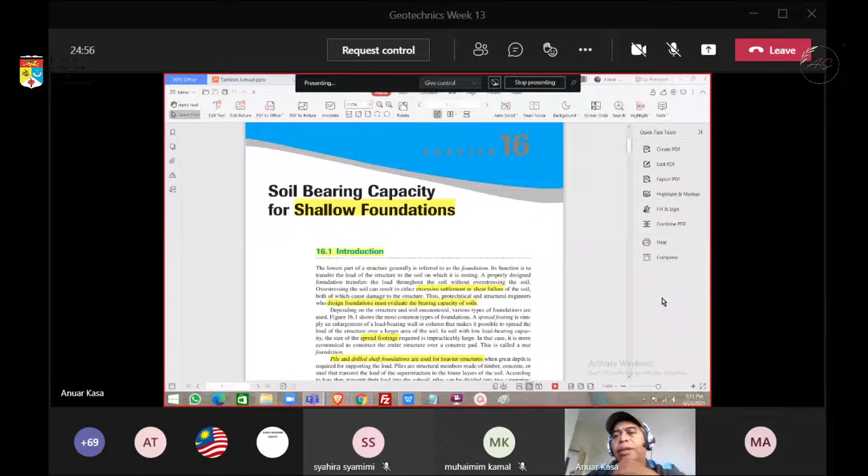To the topics. I think we should discuss the e-test next week, and I happen to know you are going to have another test. Is that right? On the same day?

Okay, and also for your lab report, I already posted the information. Actually I just got it from the textbook, but I think it's fine because I'm not measuring your skill for this course - it's just a report, not the teamwork. So I think it will be fine if we just use the data from the textbook only, and I don't see much difference. So I already posted the information regarding the lab test.

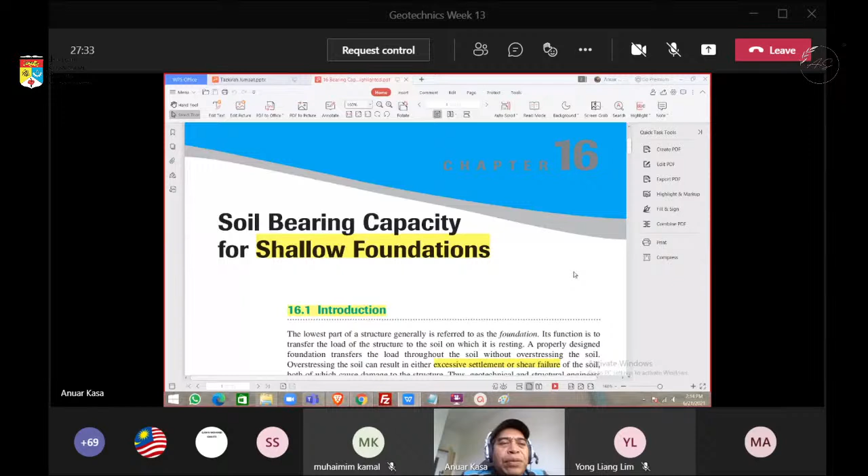I hope you can come up with the lab report for direct shear test, consolidation test, as well as triaxial test. Each group just submits one report, and the time is flexible as long as you submit during this semester, even until final grading - even during the final exam week it will be fine. Since we don't have the final exam, you may have time to do it, or it's better if you could finish it before the exam, or do it the latest during your review week. You have a break of 1 week before the final exam, by that time you should be able to finish the lab report.

What you can do is distribute the workload. You have 5 members in a group, so just distribute the load. That would be a good idea for you to finish the reports as soon as possible. Is there any question regarding the lab reports?

Okay, if you don't have any questions, then we can proceed with the material. You can also ask me regarding the e-test. For this chapter 16, it is about the soil bearing capacity of shallow foundation.

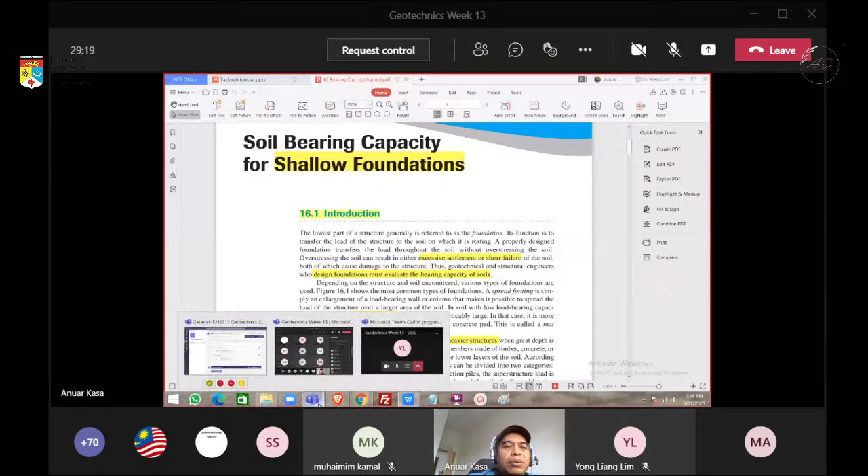Normally we design, or when we want to construct foundations for any building, first of all we need to know what is the soil.

To do that, we need to do what we call site investigation, where we bring equipment to the site and do boring tests. We try to get the soil sample for every meter of the soil, take the sample and bring it to the labs.

Then we do some tests such as Atterberg limit test, compaction test, direct shear test or triaxial test, as well as the consolidation test, so that we can get the soil parameters. Only when we get the soil parameters can we design the foundation.

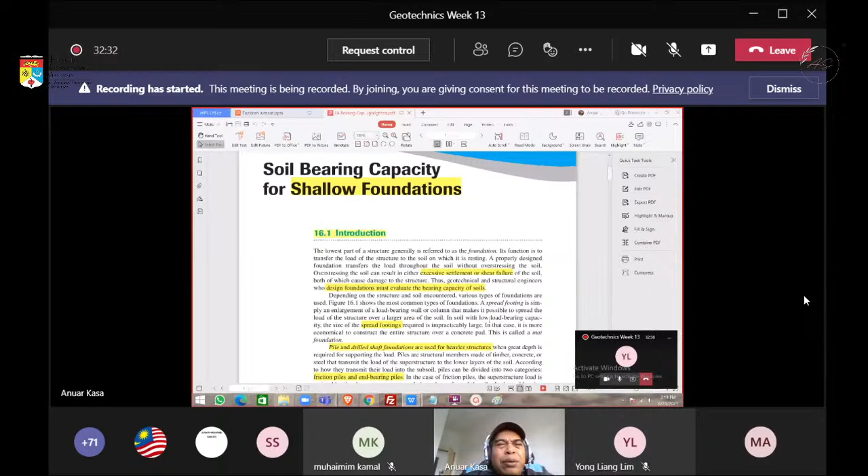In normal practice, we try to get the soil sample under the columns - the main column, the most critical column, which has the largest values, for example maybe 300 kilonewton. Then we know roughly the load that will be imposed on the soil, and only then we could do a better or more accurate lab test, because we know the pressure that will be applied on the soil.

So for our test, for example the direct shear test, the load should be in a certain range. When we test the soil, let's say it is 300 kilopascal, then we should test at that value, at least 300 kilopascal for that sample. Then we would get better soil parameters.

So normally that is how we get the soil parameter. But for most textbooks, the soil parameters are already given. For example, we already know the unit weight of soil, the cohesion C value, and the phi value, the internal angle of friction. Normally those are obtained from direct shear test, and for more accuracy, triaxial test. From consolidation test, we get the pre-consolidation pressure PC, and we also know the Young's modulus E of the soil. From that, we can do the design for the foundations.

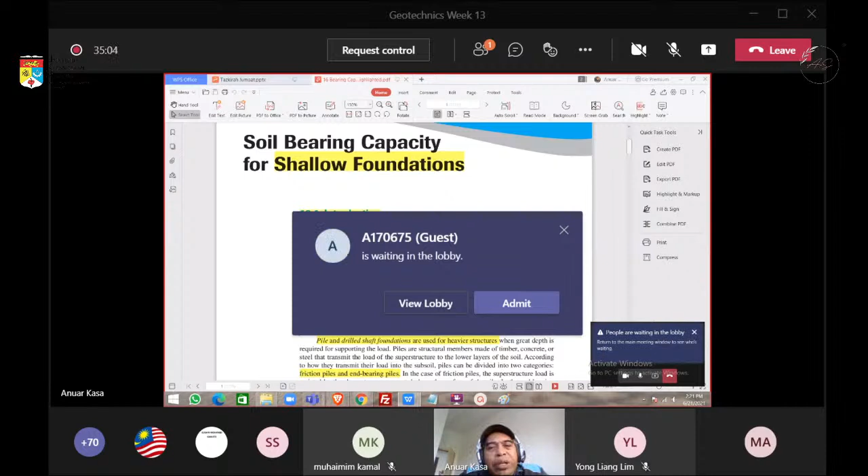For this textbook, normally we are given all those values, and here we would like to know the theory.

For example, bearing capacity for shallow foundation. Normally when we design, we don't know whether we are going to do a shallow foundation or deep foundation. Generally, we just base it on the type of building, for example maybe a 4 or 5 story building. If the soil is good, we can just use a shallow foundation, not a deep foundation. Deep foundation is like pile, which we see a lot in construction for high-rise buildings. They use pile, while for shallow foundation we are talking about not deep foundation.

I think there is a type of shallow foundation also mentioned in this textbook. So, okay, we go straight to the topics.

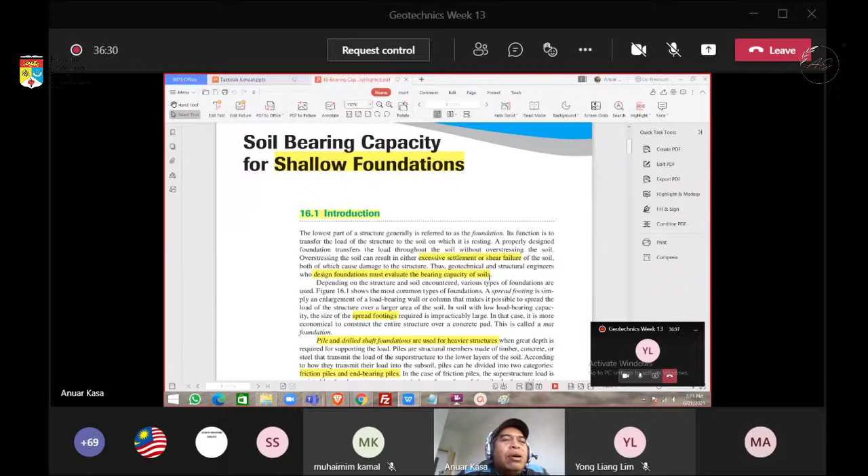Normally we want to know whether the soil can take the load of footing or columns or not. And we would also like to know the settlement, how much the soil settles. From that, we would know whether the foundation is okay or not, and whether we want a shallow foundation or a deep foundation pile.

Okay, so here it says, for example, the pile, and some call it drilled shaft foundation. Normally for heavier structures, more loads, or high-rise buildings, we need to have a pile foundation. For small buildings, for example a 2-story bungalow, a normal one, if the soil is good, then we don't need a pile. We can just have a spread foundation or pad foundation, mat foundation for footings.

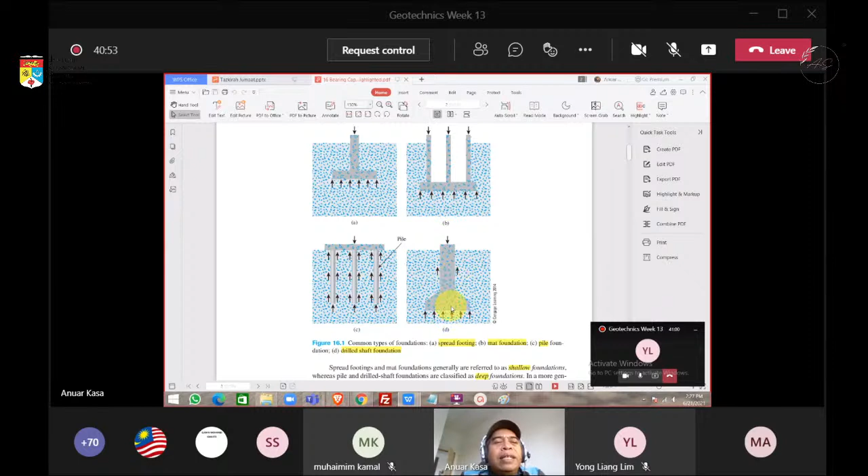And the other one, this is the drilled shaft foundation. So this is how it looks. It takes the load at the bottom part here as well as the friction, but here the bottom part has more area to cater for the loads. So roughly that is how we decide whether to use a deep foundation or shallow foundation.

Okay, we need to know what is the ultimate bearing capacity - how much the soil can sustain the load of the building. The ultimate is the highest one. So what is the highest strength or capacity of a soil to bear the weight of the structure?

Here we can see, let's say this is the foundation and this is the soil. If there is a load on top of the foundation, or the weight of the structure, through time we will see an increase in settlement - the value will increase until a certain point, for example point 1. That is the general shear failure, we call it. If it goes as if there is no peak, then that is local shear failure. So it's important to know general shear failure versus local shear failure. General normally reaches a peak; local is still progressing.

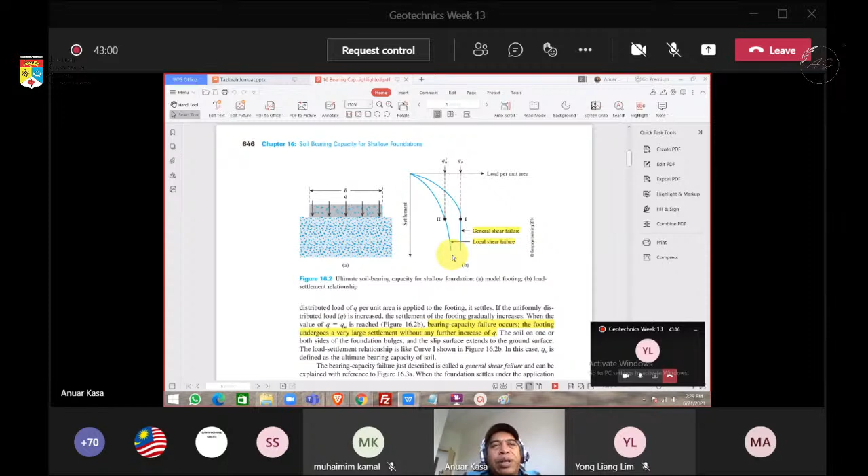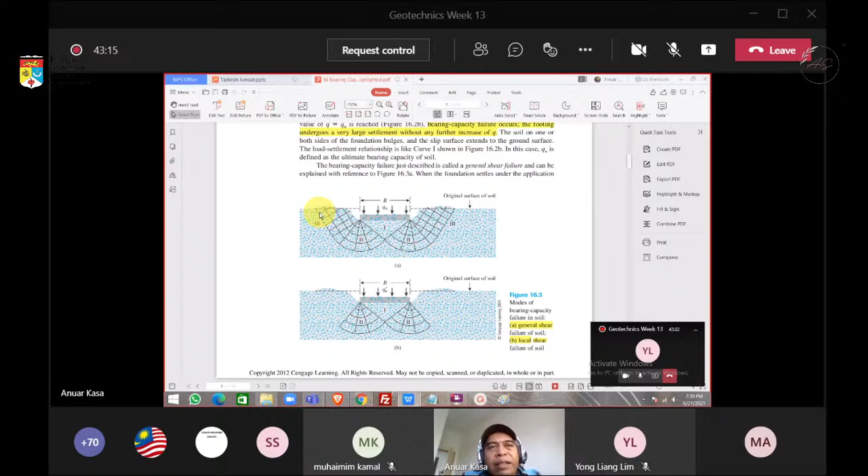Here for part A, this is the general shear failure, where let's say this is the foundation. When there is a load on top of it, the soil will settle and move downward, creating a triangle under the foundation, which is area 1. The foundation is pushing the soil until there is a shear along the envelope, creating area 2, and area 2 on the other side as well, so it is symmetrical. It pushes the soil until there is a bump, the soil displaced, and that part is part 3. So this is the general shear failure.

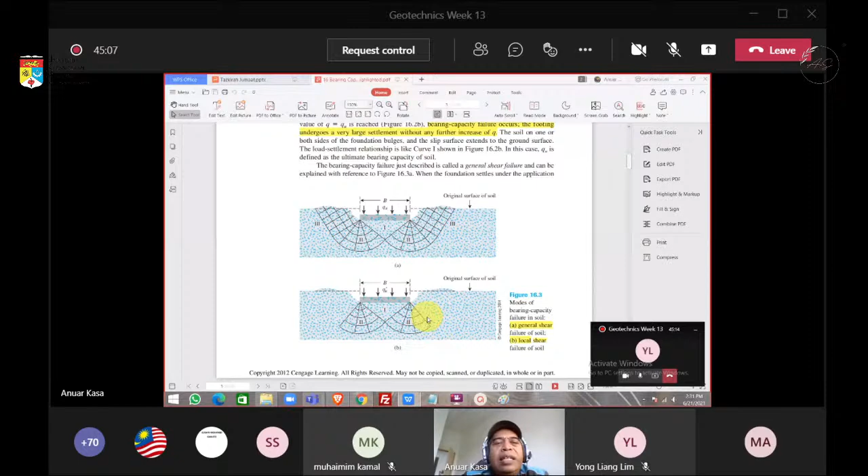And part B, this is the local shear failure. Local means it still hasn't reached the surface of the soil. There would be a buckle or a bump on the surface, but the soil isn't reaching it yet, it's still progressing. So we call it local shear failure. So this is the concept. You need to understand there is a general shear failure and a local shear failure.

And then we've been introduced to Terzaghi's ultimate bearing capacity equation. This is a well-known method for calculating the ultimate bearing capacity, used by practicing engineers.

So the issue is, for example, a shallow foundation like this one, and here we introduce a depth of foundation. So from the bottom until the surface of the soil, that is the depth of foundation.

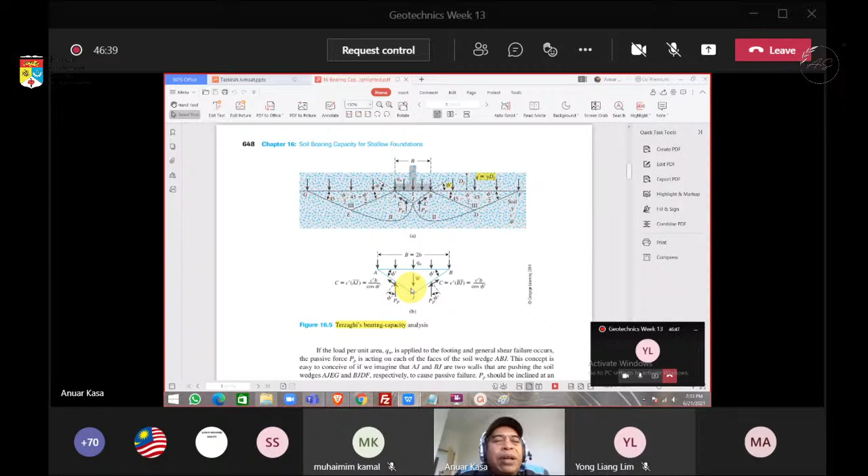This equation is actually based on this triangle, where they calculate to find the equilibrium of forces between the external forces and internal forces, as well as the shear force. By using that concept, they come up with the bearing capacity equation. Terzaghi came up with the bearing capacity equation, where you can spend your own time looking at how they derive it.

What is important here is this: the bearing capacity equals C times NC plus Q times NQ plus half gamma B N gamma. The values NC, NQ, and N gamma are given by equations 16.5 through 16.7. So this is the equation.

At the end you come up with the ultimate bearing capacity, Q ultimate, according to this equation, where C is the effective cohesion, Q is the surcharge, and B is the width of the foundation. So here we have the equation, and we can calculate the bearing capacity using it.

At the end, we need to consider whether the foundation is square or circular. For square, the equation is like this one, with 0.4 instead of 0.5. Normally it's 0.5 or half, but here they use 0.4 and 1.3 as coefficients for C, the first term, and 0.4 for the other term. So if it is a square foundation, use this equation for ultimate bearing capacity.

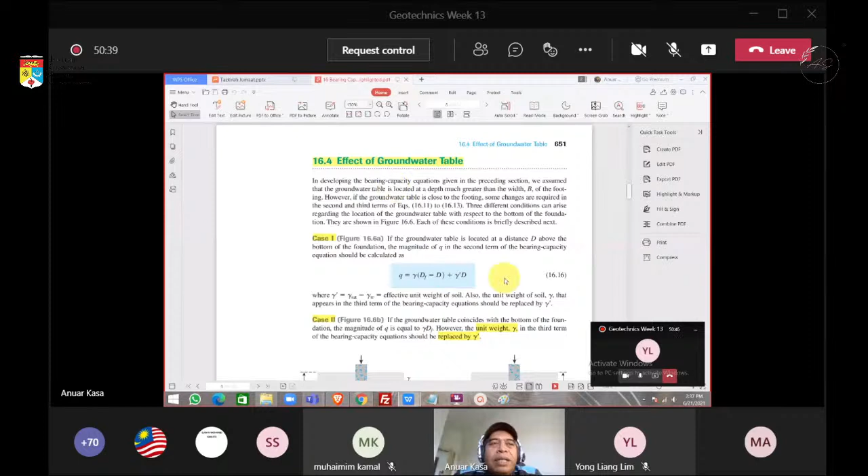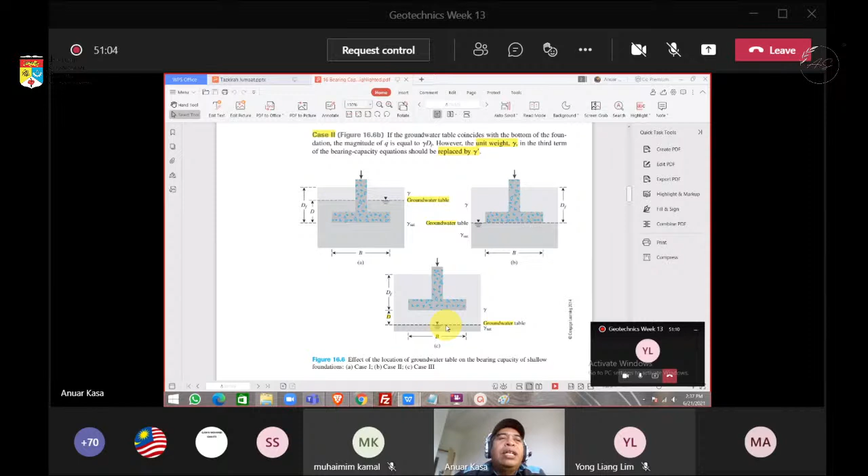And here is when there is a groundwater table. There are a few cases here: case A, when the groundwater level is above the foundation; case B, when the water table is exactly below the foundation; and case C, where the groundwater table is below the foundation. So they call it case 1 until case 3. You just need to use the right equation here, and it's also important to get the value of D f.

D f here is the height between the below the foundation until the surface of soil. So you can use the equation given for those three cases, and to calculate the factor of safety, which is very important in design of foundation.

Factor of safety normally used is about 3 or more, meaning that if you design the foundation, it can take 3 times, it is 3 times stronger than what it's supposed to be. So you triple the strength. In that case, it is less likely that the building is going to fail due to foundation if everything is taken care of, because it's supposed to be 3 times or more stronger than what it should be. Unless something is beyond our control, then I would say our foundation is not safe.

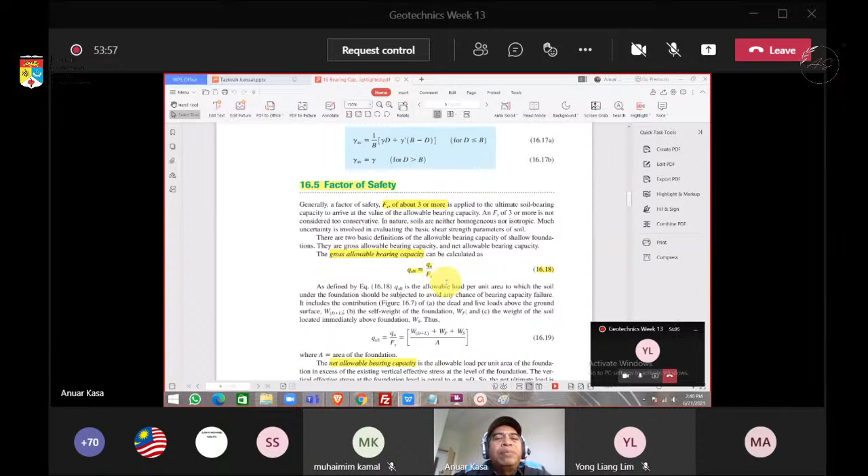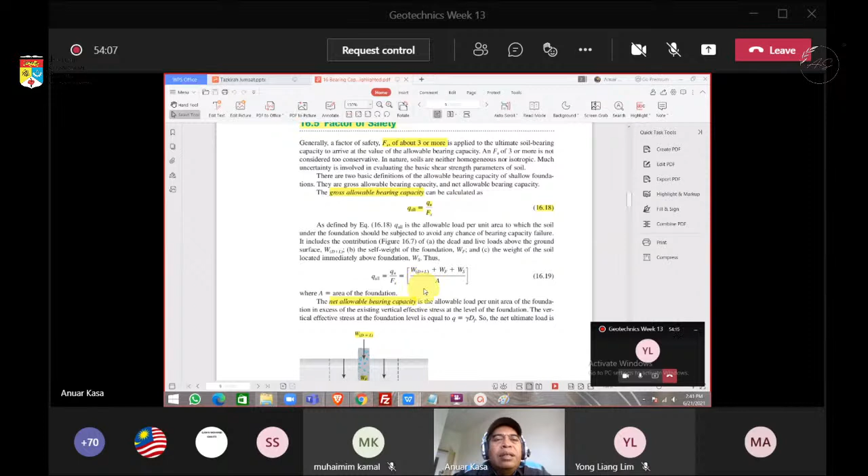So Q allowable is the one that we allow for the bearing capacity, so it is much lower, here about 30% of the Q ultimate, the ultimate bearing capacity. So it's also given here in the equation. You can use this equation, and I think it's quite straightforward. If you read this one, you should be able to understand.

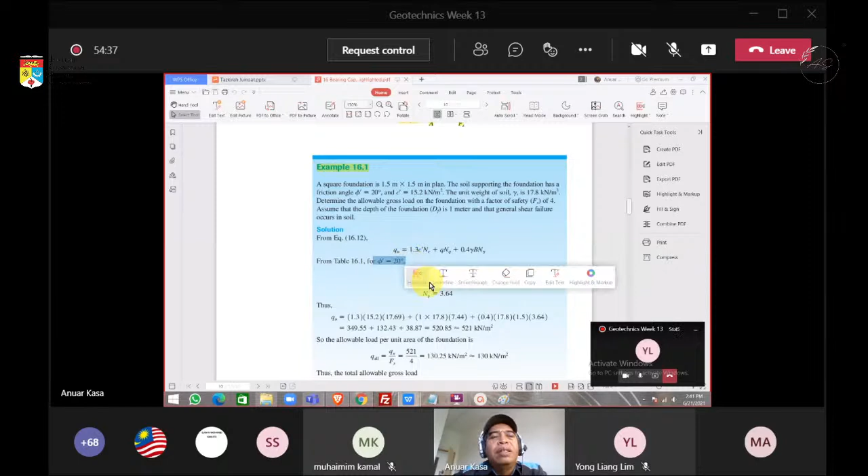We do have example 16.1 to understand better, so we can see how they use the equations and how to use table 16.1. For phi equal to 20, for example, we just check with the table and get the value here. And since this is a square foundation, they're using the equation for square foundation.

And if we just continue, Q allowable using this equation gives us 130. And then if you want to know what is the total allowable gross load, this is the load at column, or loads applied on the footing.

So we need to use this equation because it's B squared, the area. So Q is kilonewton per meter square divided by the area, since we want to know Q, pressure equals Q over area. So we bring the area here, multiply it with the area, so Q force equals pressure times area, B squared here.

So that is how we calculate, we know what is the allowable column or foundation load that we can apply to the foundation.

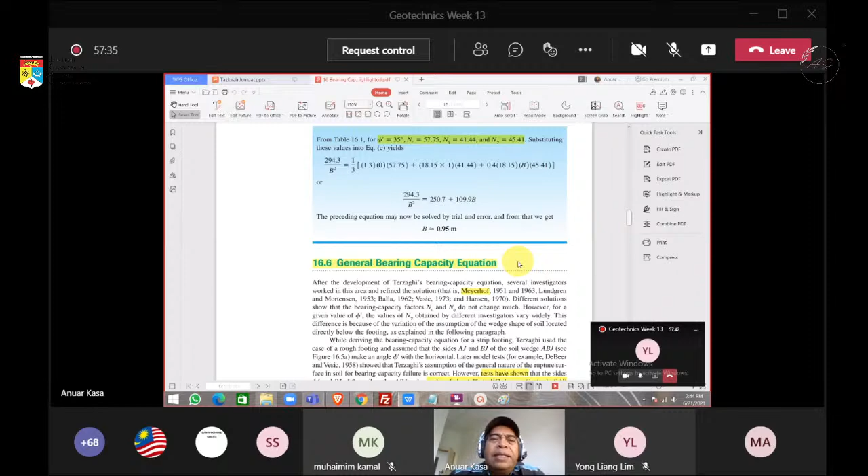Just now we were talking about the Terzaghi bearing capacity equation. Now there is another equation which is a general purpose one, the general bearing capacity equation, which was come up with by Meyerhof and some other researchers, but normally people call it the Meyerhof equation, or the general bearing capacity equation.

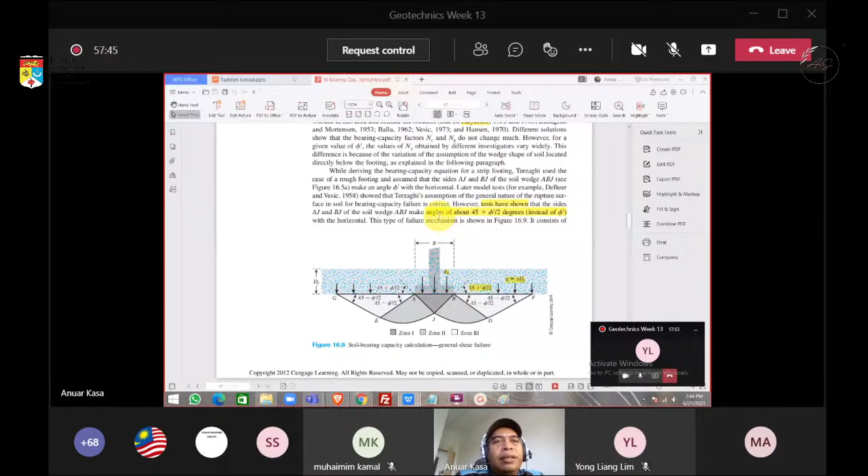It is more or less the same, except it is more general. So here I show you the difference: they are using the angle 45 plus phi over 2, that is different than Terzaghi, instead of using phi. So then the calculation becomes more complicated. I think you can read the derivation here, and at the end they have

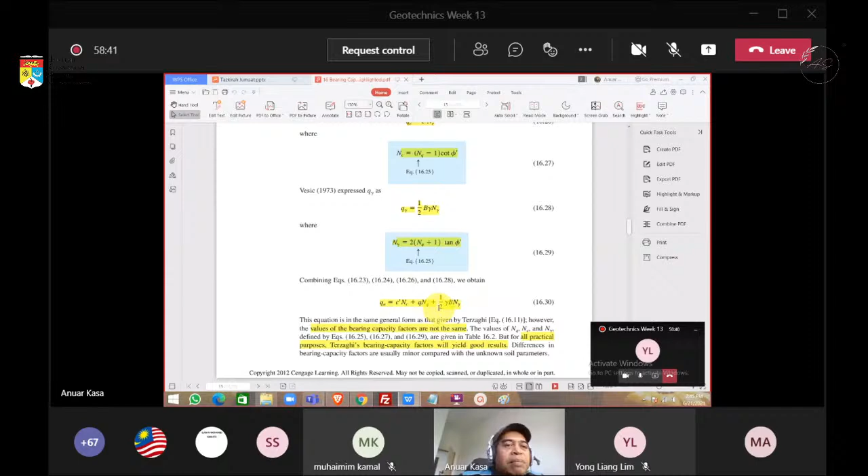an equation in the form of this one. First they have this equation, which is quite similar, the same general form more or less, but now they introduce depth factor, shape factor, and inclination factor. When they introduce that, it becomes like this one, the modified general ultimate bearing capacity equation. So this is the general one.

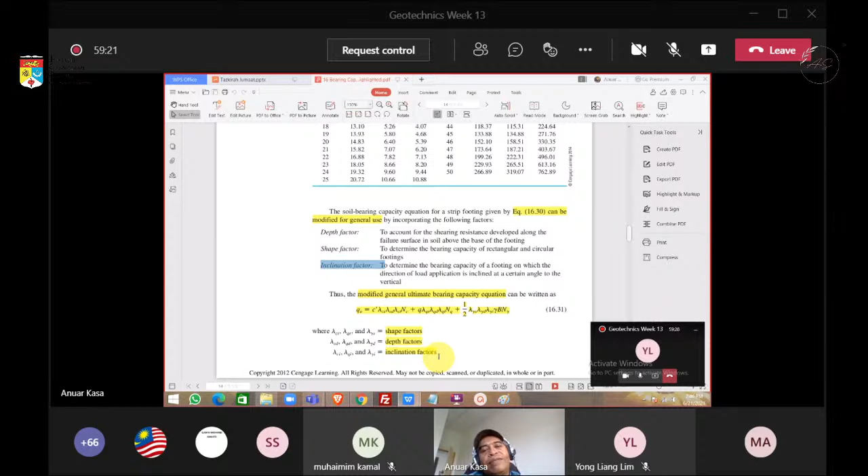So we need to know what is the lambda, CS, and so on here for the shape factor, the depth factor, as well as the inclination factors. And those values are given: for example, the shape factor, the equation for lambda is given by equations 32 until 34, where L here, we need to differentiate between B and L, because normally L is longer than B. Let's say we have a foundation that is 2 times 4.

So L is 4 and B is 2. B is always less than L, L is always greater than B. So we need to check for that one also, sometimes we may use a different one.

So for the depth factors and also the inclination factors, the equations are given, and then you can just use the equation for calculation.

Whatever was before this, the value is for the drained condition, meaning effective stress, with the prime on top of the value. So you need to find C prime and phi prime, that is the drained condition. If you remember the lab test for triaxial, and sometimes also for direct shear, there is phi and effective phi value, as well as C and effective C. That effective means it is under the drained condition, meaning the water is removed from the sample.

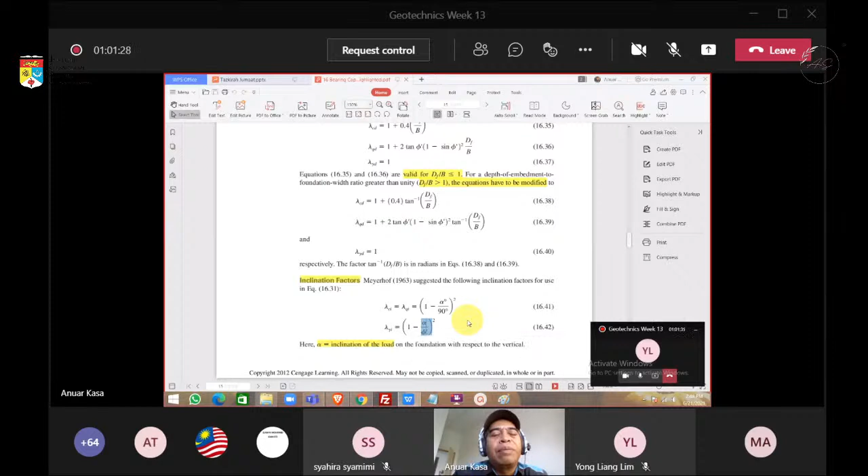But for the undrained condition, this is the total stress, we are talking about total stress. If you remember, effective stress equals total stress minus U, or pore water pressure. So if you want to calculate in terms of total pressure, the equation is given here, and the equation transforms to this one, that is for total pressure.

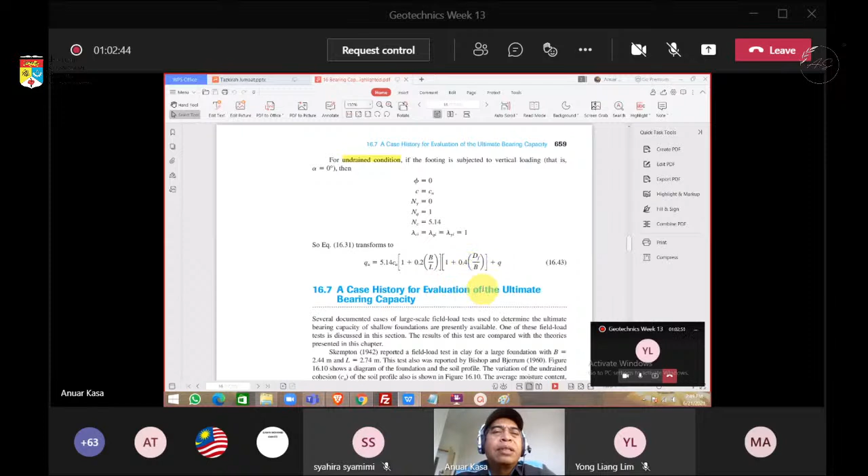You may ask why we want to use the effective pressure and the total pressure. Normally for temporary works, let's say you want to analyze temporary works, we use the total stress equation. But let's say it's for permanent, longer time work, supposed to be the final one, normally we use the effective stress. For temporary works, we can just use total stress, for undrained condition.

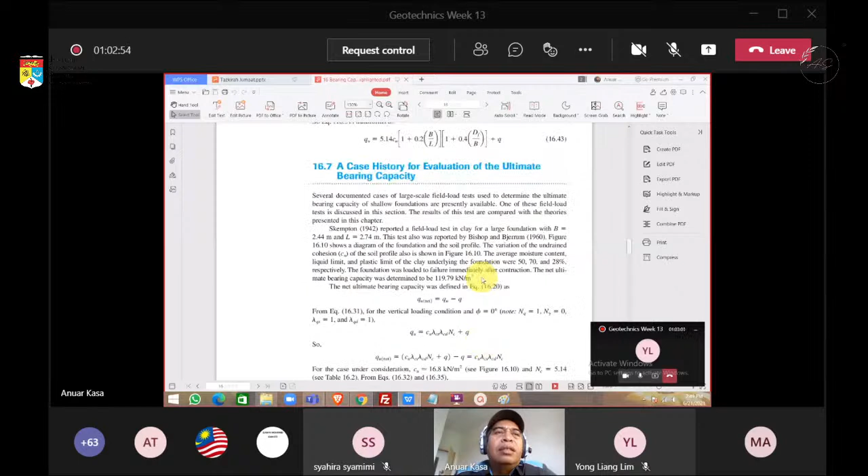So this is the case. I think you can skip this one, the case history and so on, but if you want to read, it's fine.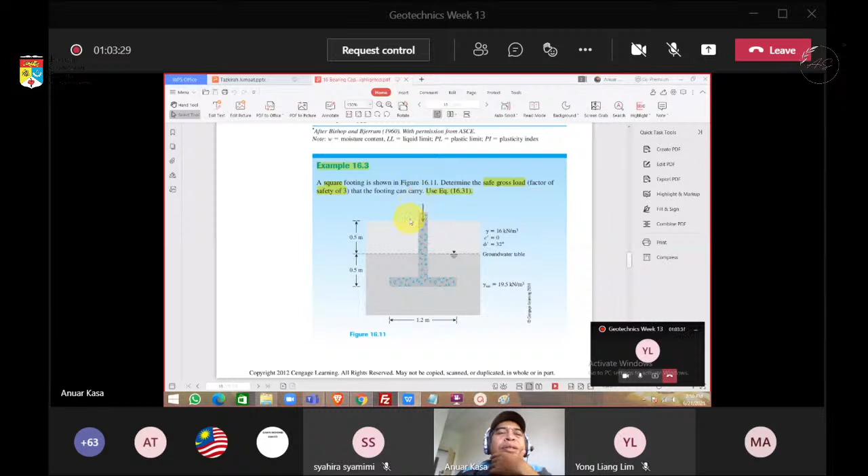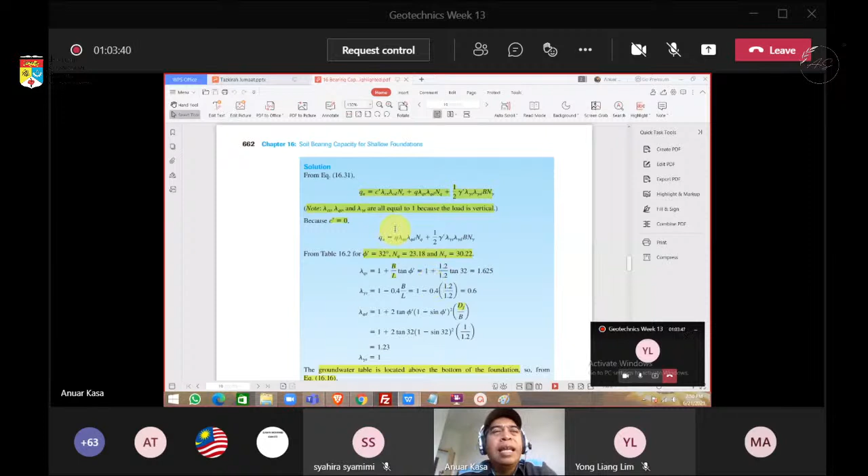Okay, so we have an example given here: how to determine the gross load for a square footing. What is the gross load? What is the P value here? What is the load here? We can look at this example problem to know how to calculate it using the general bearing capacity equation, where they are using the shape factor here.

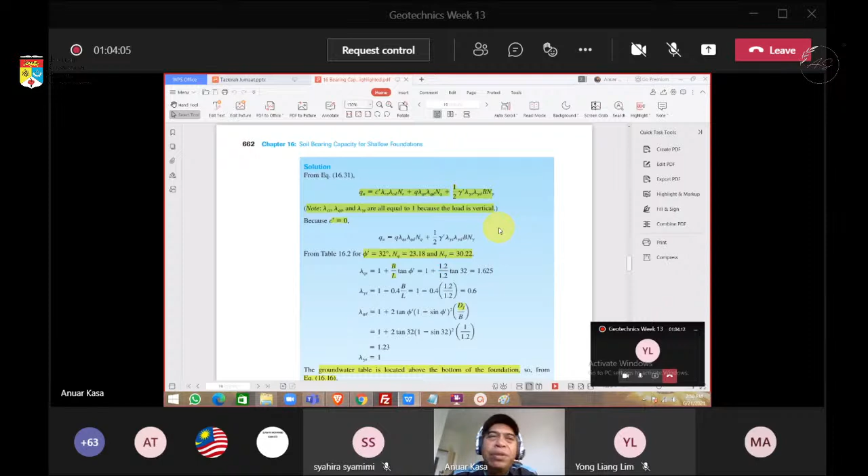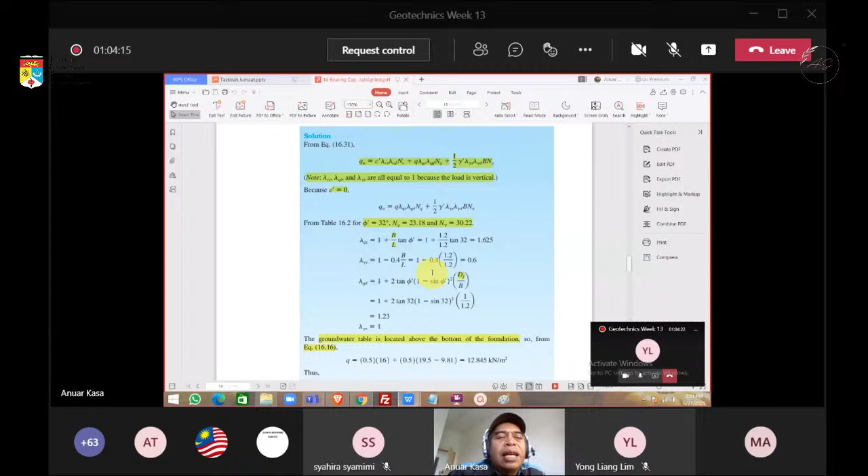If you look here, they're using the shape factor, the depth factor, and also the bearing factor. So this is the general bearing capacity equation, or the Meyerhof equation. You can see you need to calculate the lambda for the depth, shape, and also the inclination factor. And here at the end we get the gross load, what is the load that we can apply to the column or to the foundation.

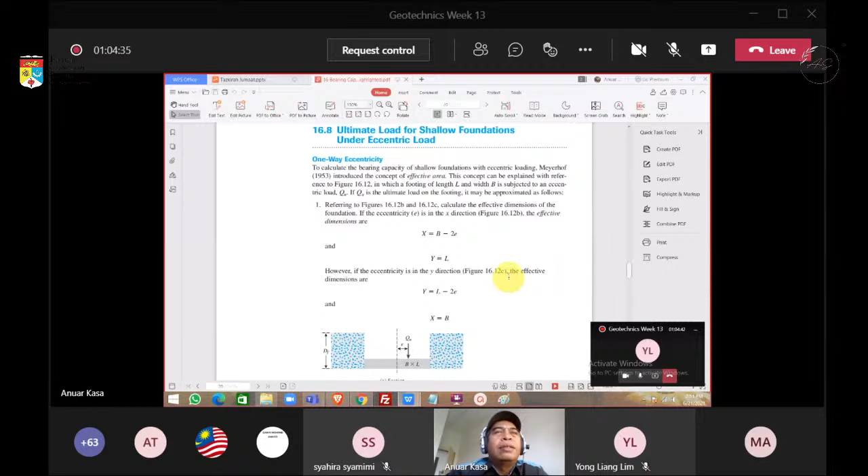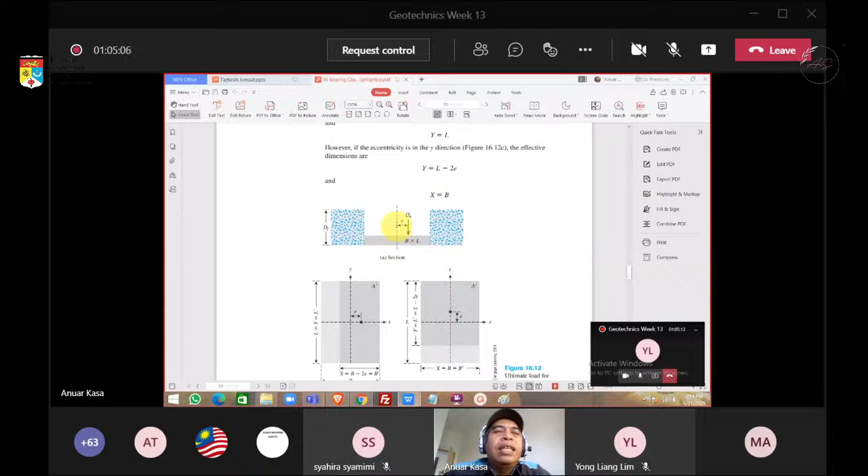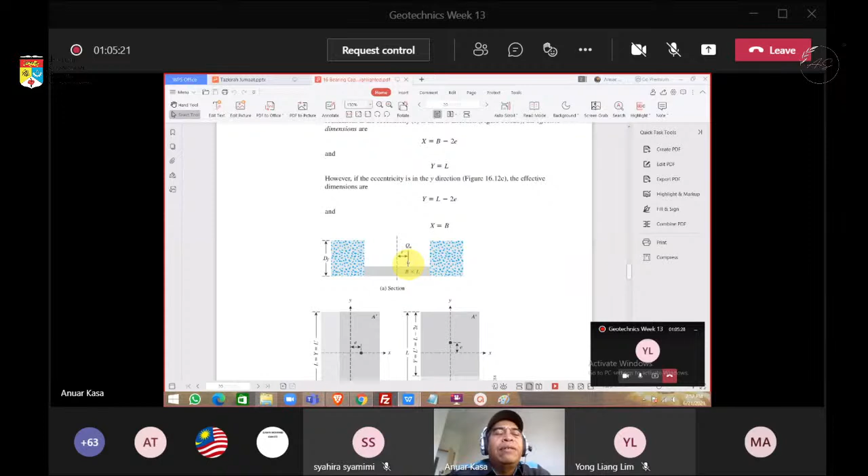And here, 16.8, where we want to know the ultimate load for a shallow foundation under eccentric load. Eccentric load, we are talking about this one here. The eccentricity is, for example, like this, not exactly at the center but a little bit off. So that is eccentricity, if the load is off the center of the column, for example, then we have to consider that using the right equation. So eccentricity meaning it is off the normal one.

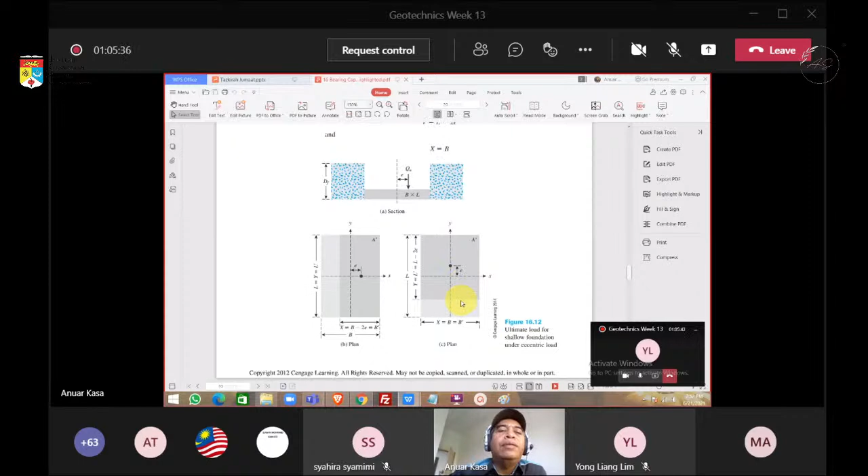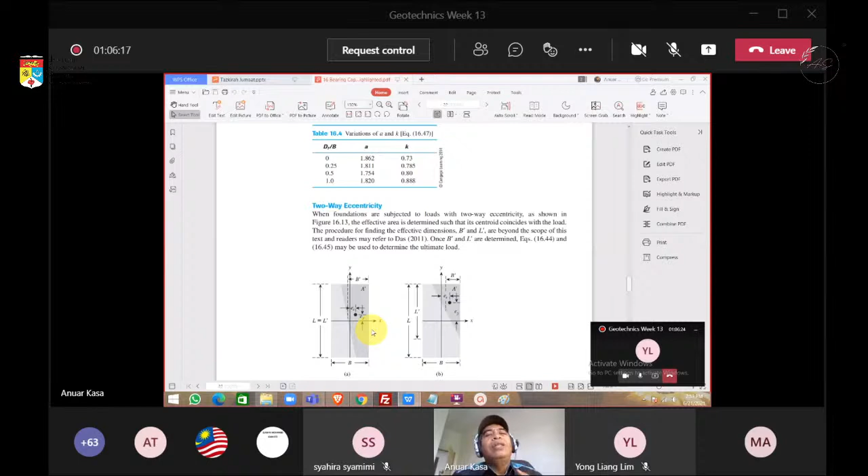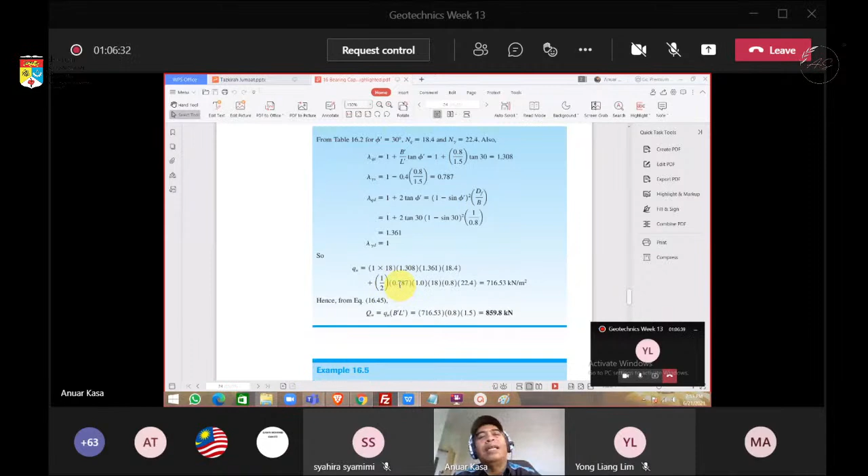So it is off, then we can use this equation and continue. Let's say we have a two-way eccentricity, meaning in the x direction as well as the y direction. So here, instead of at the center, the point of interest, the load we apply off the center, so we have the y value and x value of eccentricity, and we need to cater for this in our calculation. So here it shows an eccentricity problem, so you can look at how the calculation is done.

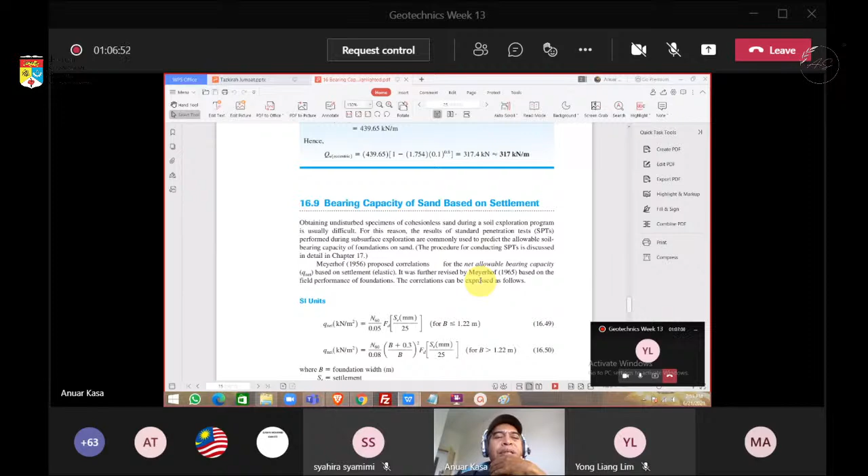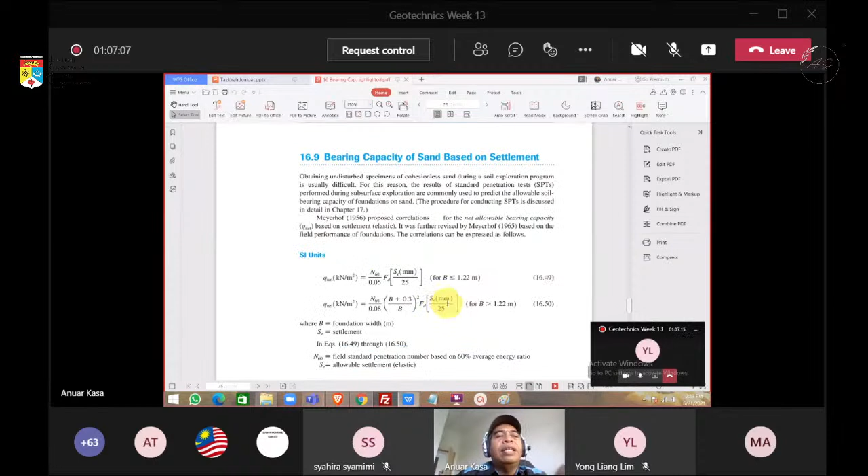And then this one, 16.9, is about the bearing capacity of sand based on settlement. So based on settlement, what is the bearing capacity? This is for sand, so you can look at what the settlement is, calculate the settlement and so on. The formula is given here, and at the end you can get the settlement.

Okay, 16.10 is about plate load test. Normally, when we do pile or even shallow foundation, we check after we install it. After installing the foundation, we go to the site and do the plate load test to check whether the settlement is within allowable limits or not.

So we need to do this. If you look at the site, you see a lot of big stones. At site, that is for the plate load test. They apply a lot of heavy stone or concrete blocks on top of the foundation to test whether the foundation will be okay, whether it can sustain the load, and what is the settlement when we apply the real load on the foundation.

And normally they apply until double the load. Let's say the column is supposed to handle only 100 kilonewton per meter square, but when they test it, they double the load, maybe 200 kPa. Then they know that the foundation strength is reliable, so it is good for the building.

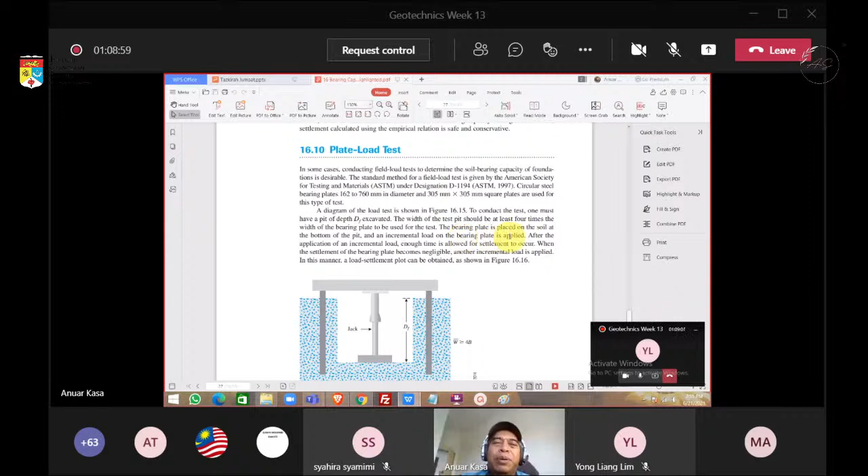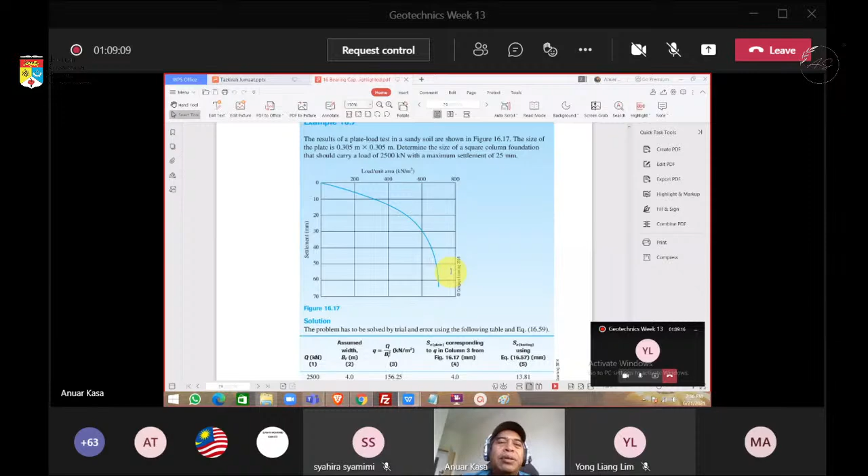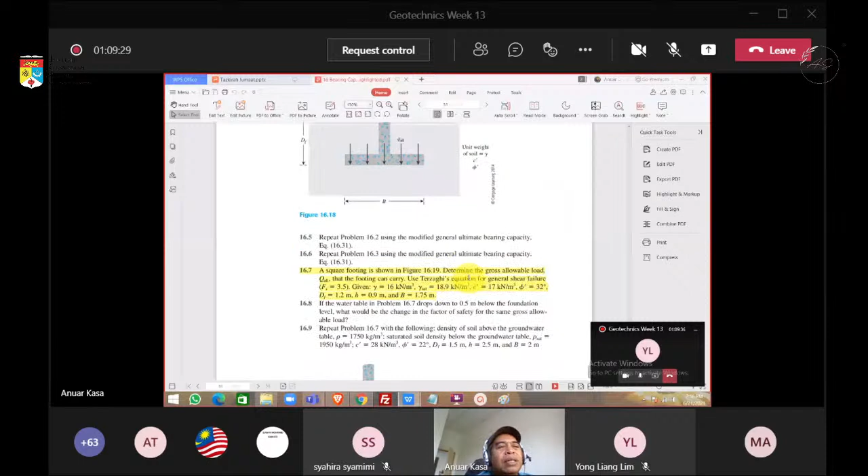Okay, but this one you can read on your own, the plate load test. So that would be the topics for bearing capacity for shallow foundation, and you're supposed to do the assignment here. I think I already posted the assignment, so you can do it on your own. Yeah, I think that would be for this topic.

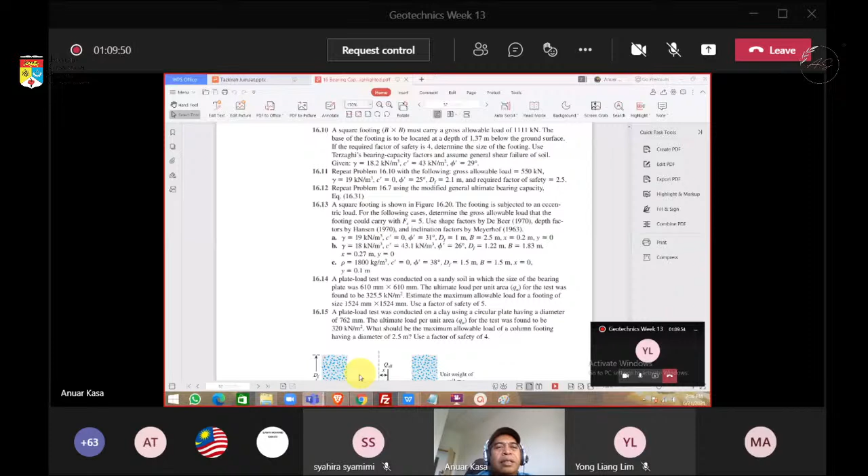Unless you like, or you have any question, then we can talk. Okay, is there any question? Oh, they're all already gone. Okay, is there any question regarding this topic? No.

Okay, yeah, you can also look at the teaching video that was recorded for the quiz students, I think last semester. So I see they are more or less the same.

Okay, then I open the floor for questions about anything regarding the e-test as well as the course in general. You can ask any question because next week we don't have much time, since we are going to have the e-test, and after that you are going to have a break, and then after that your final weeks. So yeah, any question?

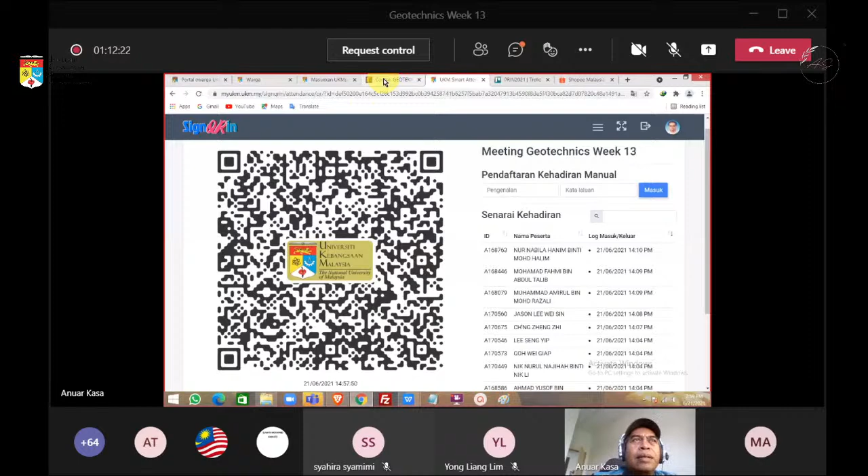Okay, let me show you. Okay, here, yeah, I think I can just look at from yours.

Okay, let's say direct shear test here. So here I already posted the problem. For example, for direct shear, each group is required to prepare a lab report which consists of a title, introduction, procedure, lab result, calculation and discussion, also summary.

And then for group 1 until 10, use information or data from problem 12.4, while group 11 until 20 use problem 12.5. So the demo for the direct shear is also given here.

And here, if you click the problem or the data, okay, so for group 1 until 10, they're using this one. So actually, it cuts a lot of your time.

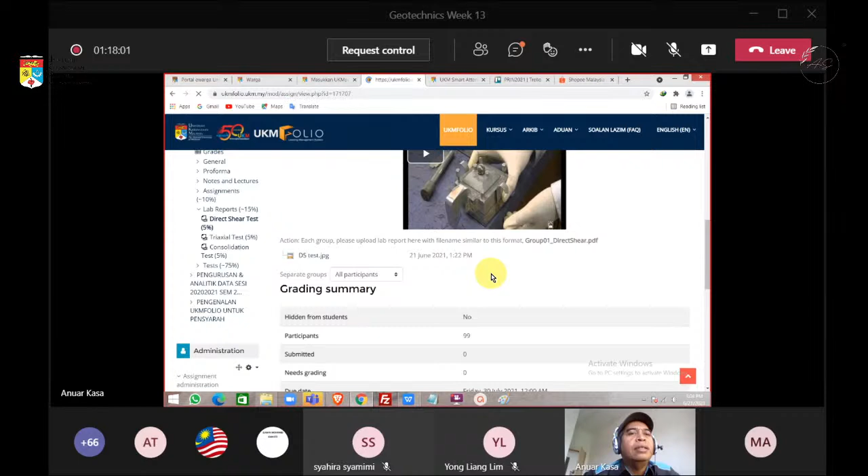Okay. If we look at the triaxial, the same thing - there are two problems given here, one for group 1 until 10, and also group 11 until 20. Okay, sample problem like this one.

Okay, here using the consolidated undrained triaxial test, CU test, and the sample is also mentioned. It has a 4-meter clay layer in the field. Estimate graphically the Mohr-Coulomb shear strength parameters C and phi, and then estimate the shear strength in the middle of the clay layer.

So this is the result from the test, where sigma 3 is the minor principal stress or confining pressure, and this is the axial or deviator stress. So you get values like this, and the pore water pressure is also given here. So similarly, if you do the test, you're going to get something more or less like this one. But from this value information, you just need to...

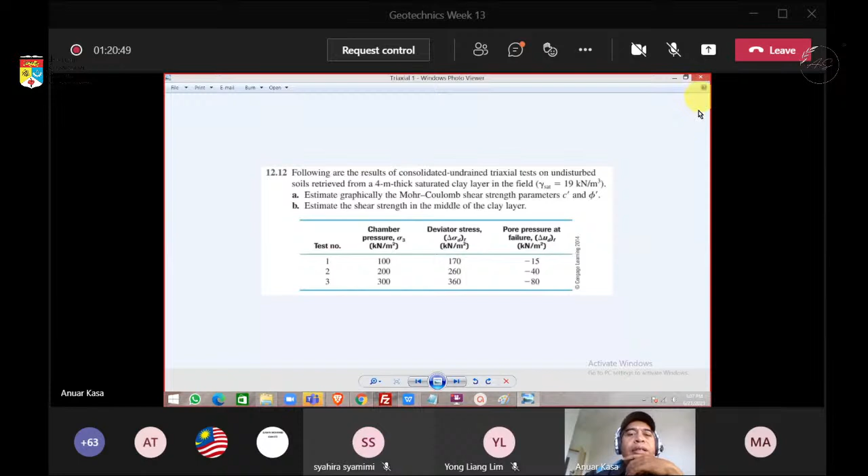Okay. And the last one about the consolidation. Okay, the same thing, we have two problems. I choose one of them.

Okay, so this is for the consolidation test, and the data is given there. It's like the lab data where you have pressure and you have the change in dial reading. Normally when we apply, we need to know the change in dial reading, that is for settlement, and it shows there in millimeters.

So we can see the reading given there, and then the specimen - actually you need to measure all those things, but here it's already given. For example, the height of the specimen is 20.6, the mass of dry specimen is 12 grams, area of specimen also given, as well as the specific gravity.

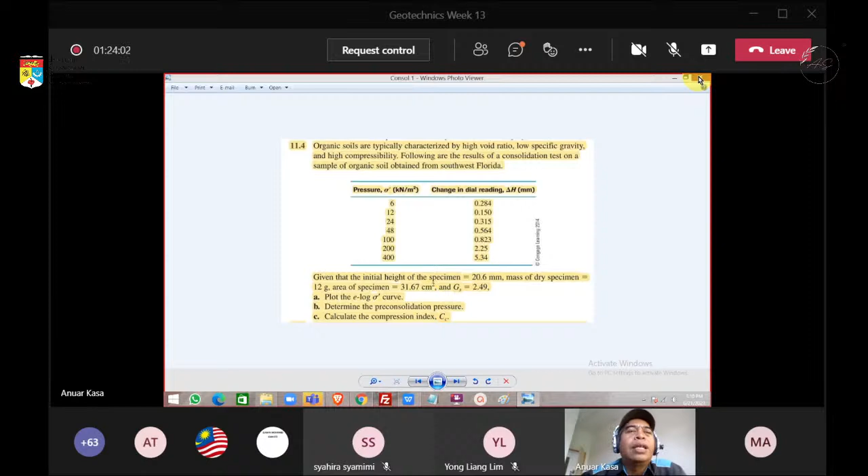Okay, so that is for your lab reports. Yeah, is there any question?